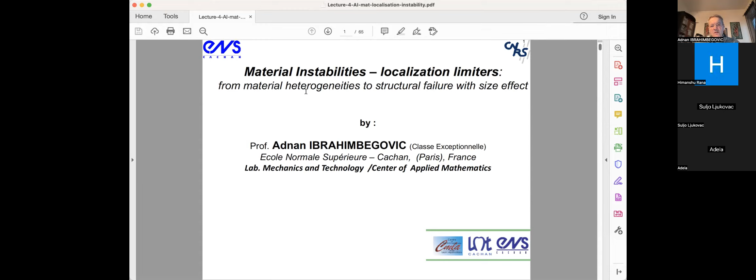That is explaining why the big structure built with the same material is not going to break in the way that a small specimen built with that material is breaking. So we'll first study the structure level and then the material level. Let's try to dwell into this a little bit.

Lots of this work comes from a long-term collaboration with Electricité de France, which is even at present I think the biggest French company. We first started collaborating with Electricité de France, then we went to the nuclear energy branch, Commissariat à l'Énergie Atomique, which is the scientific branch of Electricité de France. Then we went to Areva, a private company dealing with reactors, now split into Orano and another part. And then we finally switched to Institut de Radioprotection et de Sûreté Nucléaire, the government institution. Autorité de Sûreté Nucléaire is the government body that gives the codes for keeping these nuclear power plants, and IRSN is actually the scientific branch of this Autorité de Sûreté.

So the goal was what? To keep these nuclear reactors operational from 30 to 60 years. That was the case before Fukushima.

So this is your typical nuclear power plant. This beautiful structure here is a cooling tower. It's a hyperbolic paraboloid type of shell, 110 meters high, a typical installation with a very complicated loading program.

Since we worked on shells, every time I discussed with Electricité de France, we had a joint laboratory, so every year they would give us two or three theses. Many of these people were working funded by this, and then several of them got jobs in Electricité de France type of environment. So whenever I suggested that we study the cooling tower, they said no, we don't care, this is just for cooling, and every year we can afford to lose one of these towers. It's not important. What's important is the ugly duck.

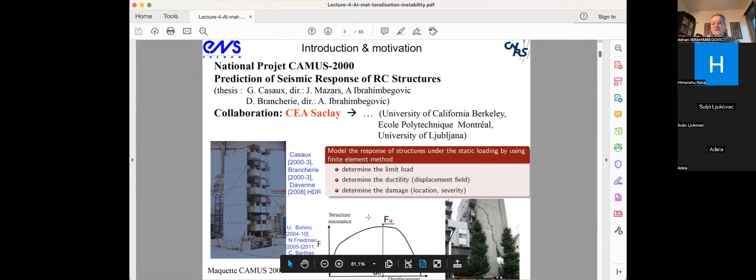Also, eventually, you had to get hysteresis loops of the stress-strain diagram, which is much more complicated. This is similar to what I was telling you yesterday with the PHL type of work, where we were able to match that. Then you can do the same thing with steel type material, starting from a very low scale, meaning you can take a typical behavior of steel with the sigma-epsilon stress-strain diagram, with lots of ductility, yield stress, and so on.

And then you turn this into a structural model. That is also something we'll discuss.

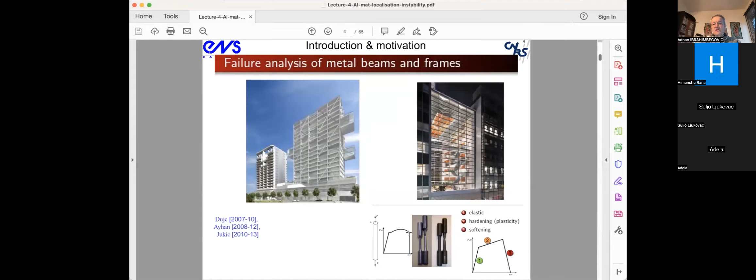So for me, it started one year after I came to École Normale Supérieure in Cachan. A year later, in 2000, we had the benchmark competition where Électricité de France asked us to present what kind of damage models we have so they could purchase them. In this competition, I think everybody who is anybody in France dealing with this problem participated, along with many people from Germany, Spain, the US, and so on.

Since I had just arrived, the way it works in the French system, I inherited three lecturers who were trained by my predecessor, Mazars and Pijaudier-Cabot, who developed these damage models in a local version. I'll talk about that in a moment.

Basically I said, okay, let's just use the stuff that you have and we'll present what you got. It turns out the benchmark was about presenting your results for a certain number of cases they put together and asked you to show your results. Among all those cases, the most difficult one to handle was this case here.

This was a plate, or membrane rather, with two notches, a double-edged notch specimen. They had a frame to keep it fairly constrained. Then they introduced a non-proportional loading program where they started by shearing this plate and then basically pulling it apart, so you can see what that provoked.

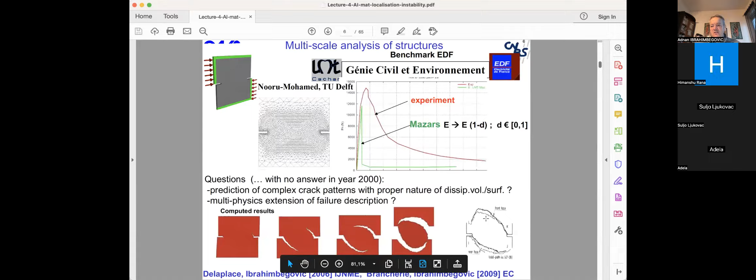The problem there is really that with such a complicated crack pattern, you have many redistributions and lots of directionality taking place. Basically, if you take finite element interpolation—for example, a constant stress triangle—whatever you do, no matter how complicated a model you put in terms of plasticity or damage criteria, your stress inside the element is constant. So basically you simply cannot represent everything taking place in a phenomena of this kind.

So we said, okay, this is really not good, and there's no way you can succeed this way. So we decided to put down certain guiding principles to construct the model. First of all, instead of trying to put everything into a single criterion, we try to separate complexity. In the process of breaking, we try to identify all mechanisms that exist, and to each mechanism we give its own criteria. So we go more in the direction of something called a multi-surface or multi-criteria type of model rather than a single criterion which puts everything together.

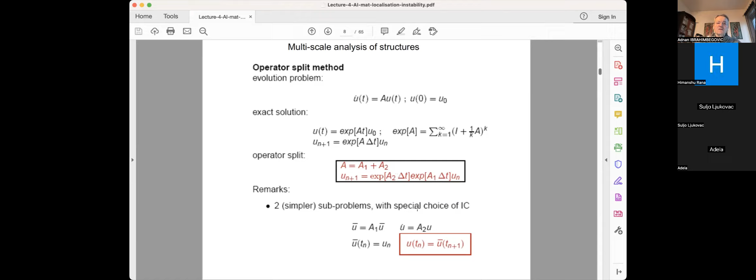So you can go towards a typical operator split solution, where you solve one part once, keep the other frozen, then solve the second one, and so on. In the operator split solution method, what's really important is that as soon as you've done the first one, you start to plug it in, and when you compute the second one, you start from the result you obtained from the first.

This was already the case for typical plasticity. Just to recall, typical plasticity with linear isotropic hardening, or what Nguyen and Halphen call the generalized standard material, has state variables that are the total strain, the plastic strain, and the hardening variable. We compute this evolution by a rate version of the equilibrium equation, d dot equals k inverse times f dot.

From that, you get epsilon dot as the symmetric part of d dot. Then epsilon plastic dot equals gamma dot times d phi d sigma, and xi dot equals gamma dot times d phi d Q. When computing this, you first get the elastic response by keeping the internal variables frozen, and once you have the total strain as the best iterative guess, you move into computation of the plastic strain and hardening variables.

This first part is global computation that concerns all the nodes, while the local computation takes place in each and every element or Gauss point. The goal of this local computation is to produce the stress and the variable Q, which is thermodynamically conjugate to the hardening variable, allowing the criteria to be negative or zero, rendering the stress field plastically admissible.

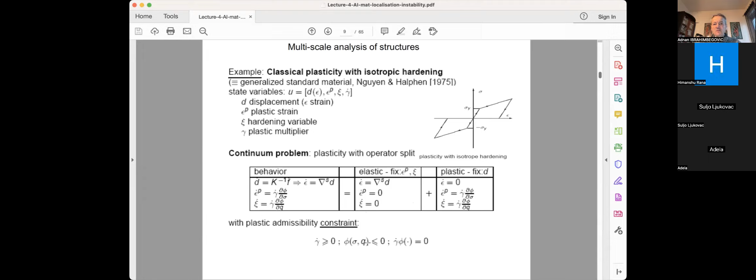Another important point: the evolution equations of internal variables like plastic strain or hardening variable should be characterized by a characteristic time much shorter than the other variables. In other words, in a simple tension test you increase stress and strain very slowly, but yielding or micro-cracking, depending on the material, happens very fast. In rate-independent plasticity models, that basically happens instantaneously.

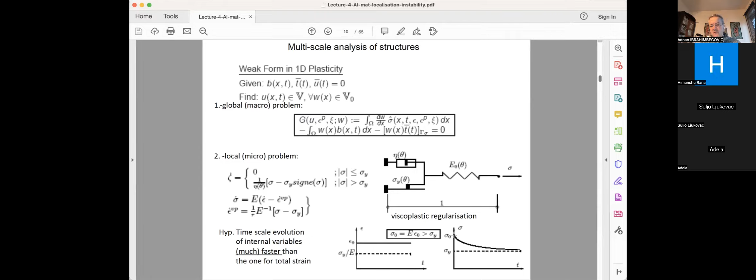There are actually two kinds of space scale, and two time scales. We are computing a problem where you have evolution of different variables, including internal variables, and you want to build this all the way to localized failure. So we have to motivate this for particular materials.

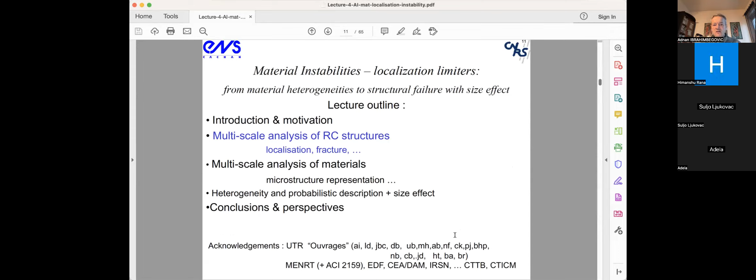Here I took the example of interest for protecting nuclear reactors, the containment structure, which was reinforced concrete, and we study localization fracture. But this type of material is rather similar to many other composite materials in aerospace engineering, such as carbon fiber reinforced polymers or glass fiber. Many wind turbine blades are made with glass fiber reinforced polymer and so on, because carbon is very expensive.

What characterizes these materials is that you have very long fibers which are much stronger than the rest of the matrix. Here the matrix is concrete and the fiber is steel. Steel is certainly much more resistant than concrete—about 20 times more resistant to tension—and it helps improve the performance of this reinforced concrete type of composite, just like carbon fiber reinforced polymer, where carbon fibers are there to maintain resistance to traction.

Now, if you really want to study the fracture of a structure built of such a composite material, this becomes a multi-scale problem. The scale, meaning the precision of the description of your model, that you need to account for depends on the goal you have.

So first we start with a study of structural integrity. In this case, at the reinforced concrete structure scale, in order to build a real model you have to deal with the concrete and steel, and eventually the interface, the bond slip between concrete and steel, to really describe everything going on. Among those, crack spacing and opening is definitely one of the most important types of data we are after.

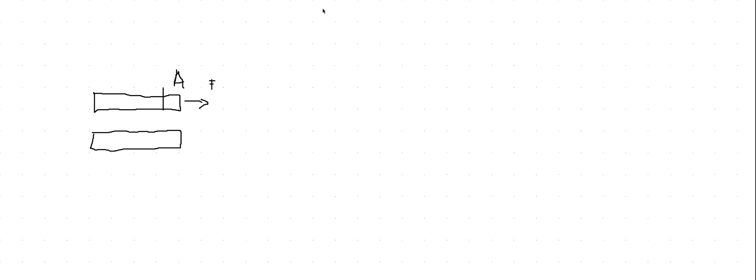Let me give a little illustration. If I take such a structure — this is my structure — and I apply here a certain force F, with a cross section A, then whatever part I cut this structure into, I will have sigma equal to F over A. If I put a support on the left-hand side, the reaction also has to be equal to F — nothing else can it be. So this is equal to some kind of constant, and before you break it completely and reduce it to zero, it is always constant.

So if I'm plotting my stress-strain diagram, this is epsilon, this is sigma. I take one situation where this is a yield stress equal to sigma y, and after that you have hardening.

If you want to do a better type of control of what is going on, I'll take my stress-strain diagram, and in one of these sections, let's say somewhere here, this will be not sigma y, but just 1% smaller. Why do I do that? Well, I take into account heterogeneity.

And basically also, I can better produce my finite element mesh, so it can go along. So when I start loading, as soon as sigma reaches 0.99, this one starts yielding. So the next step, this one will go into elastoplastic deformation, while this one will still be at the previous level. So for the hardening part, I have this one here, and there's just a tiny bump, and then everything else will be the same, which corresponds to this epsilon y, let's say.

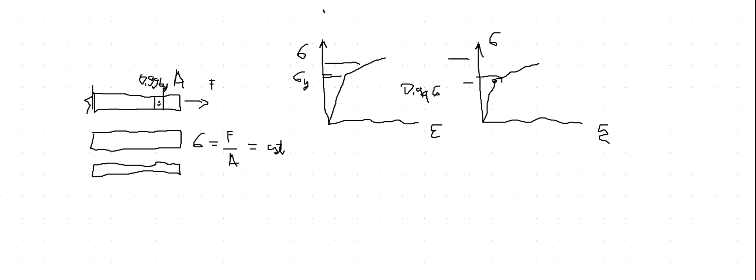Here I'm already a little bit more than epsilon y. The idea is that when you have hardening, I can reach the same level of stress, and they can catch up, and only this little bump will always appear, but you can ignore it if it's not too big, and everything's fine. Now imagine that you don't have a hardening, but you reached with sigma y the peak of resistance. So up to sigma y, you are loading elastically, you're going up, and after that, this is the end of the story, you're going down.

So imagine now again, you have weakened the other guy, and so this is not sigma y, but this is 0.99 sigma y. And then you go down. So this was elastic loading, and this is your plastic loading. So what happened this time, when you reach, now this is your epsilon for hardening. And let's see what would be epsilon for softening. In the softening case, you would reach 0.99 sigma y divided by E. Up to there, everything is fine.

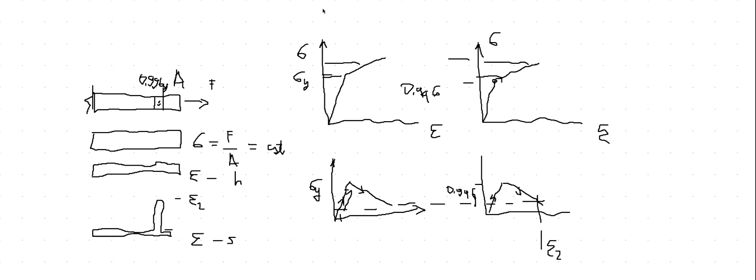Now, if you want to represent this type of thing with the finite element method, you would need to take into account really very large displacement gradients in order to get this under control, which is definitely not so easy. A single element will not do it, that is for sure.

So basically, just to give you a glimpse of that, what happens is the more elements you put, for example, stress is always constant, but you put something like 3, 7, 15, 25 elements, the strain profile is such that basically only one of these elements, which is weakened, plastifies, it goes down to softening, and only that one gets a very large strain, and all the others unload elastically.

So if you now take this to a usual finite element computation, the dissipation is the length of the element which is plastified. So as the mesh gets smaller and smaller, the element which plastified gets smaller and smaller. So integrating over something which is very small, you get something close to zero. A finite value of strain, integrated over something very small, becomes something very small.

But this cannot be representative of the real fracture phenomena, because you know by experiments that if you want to break even a piece of paper, you kind of have to put some energy. So basically, this was obviously a problem, and that led to mesh-dependent simulation, mesh non-objectivity, and stuff like that. So instead of converging with many more elements, you start actually getting something which has no sense, you go to zero. So people have noticed this, and they tried for a long time to take care of this.

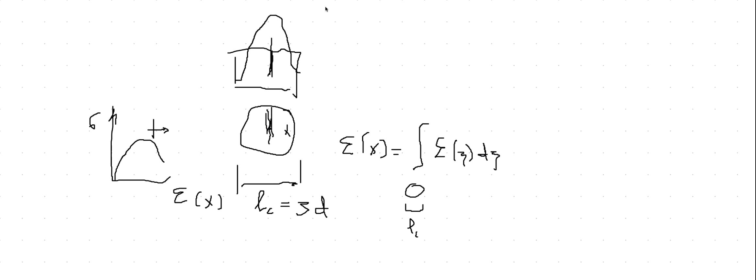He said for concrete, we take three times the grain diameter of the concrete. But the grains you have, like aggregate, you have big and small ones. So which one do you take, basically?

And then when he left and I replaced him for one year, most of the time I was helping with his students. There was a young lady working on this, and they were studying this non-local damage model to identify results for the three-point bending test with a notched specimen.

So if you start breaking here, he would take this region, and in the strain that you want to average, you get the strain at the other side of the notch, which is a little bit crazy. What the hell? When you have a notch, when you have a crack here, obviously these two strains become quite independent, they kind of separate because they don't talk to each other, the crack is in between.

So there are many things you can criticize, but anyway, that was the way they were doing it at the time, the non-local model. In the code used by the nuclear industry, code Castem, well now it's called CAST3M, like third millennium, they have this Mazars model, E times (1 minus D), with a piece that was done by the non-local model, putting in this characteristic length and stuff like that. They might have a similar thing in Code_Aster, used at Electricite de France.

Then they realized that the same trick with the non-local model, you can do it with the gradient model. Basically, going from the crack band to viscosity is the same thing here.

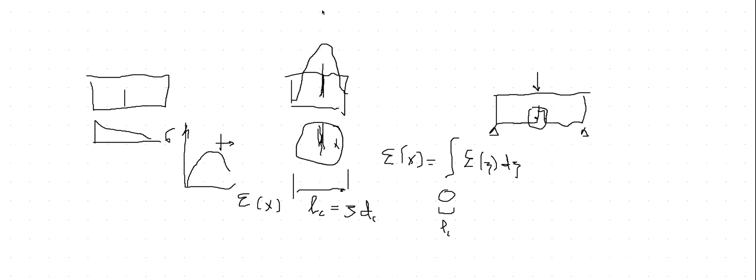And if I want to represent the crack, I take a Heaviside function, h at x bar, where x bar is the given location where the discontinuity occurs. This equals 1 when x is larger than x bar, and 0 when x is less than or equal to x bar. So basically you get the displacement jump, which describes this crack.

And indeed it corresponds to something we've done intrinsically, because you could see this strain profile getting more and more sharp. So now you take the displacement to be n1 u1, n2 u2, plus this Heaviside times the displacement. If you build the whole displacement field, it would look like this: u1, then a linear interpolation, then a jump, then another linear interpolation.

So what's kind of tricky is this parameter - u would equal n1 u1 plus n2 u2, which is your usual interpolation where u1 and u2 are nodal values. For example this is your u1. Then plus you put this Heaviside function of x at x bar times some parameter alpha - that's your alpha. And here would be u2 plus this alpha. If you do this, it turns out every adjacent element has to know about your alpha.

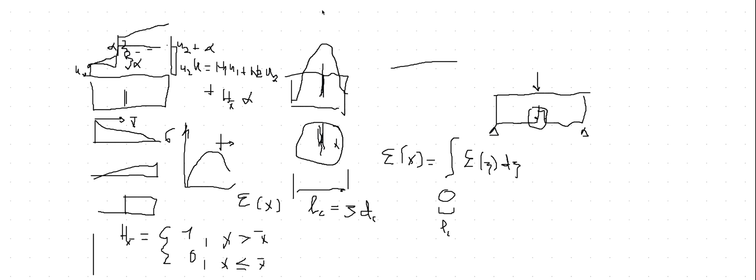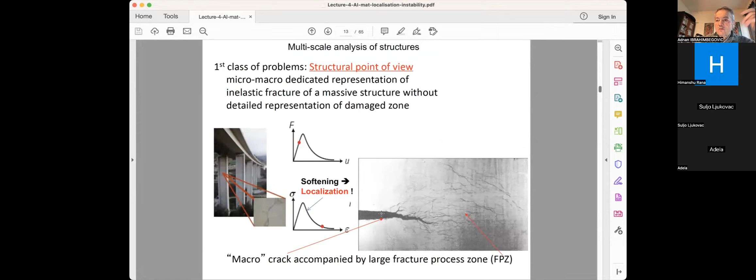The difference from what other people are doing, and the thesis of Delphine Brancherie - what we've done is account for the fracture process zone, because our structures of interest were massive structures which have this fracture process zone. For this case, you're still hardening, then you go into softening with the crack. So in a 2D, 3D situation, the crack can be developing in one direction while the fracture zone remains active in another direction where the crack isn't influencing it. If you go to non-proportional loading, you have to handle this more general scenario, and that's actually what we're aiming for.

In the 1D case, that came down to this: rather than having just elastic and then softening, we had elastic, then a fracture process zone for the micro cracks in the fracture process zone, and then you go into softening. And when you unload, of course you have plasticity and stuff like that.

So what comes out of this analysis - we again go through thermodynamics with the criteria for yielding. We'll discuss this in a moment. But the idea is that the total dissipation can now be split into the volume part - this is what you normally take for plasticity, sigma times epsilon plastic dot, plus hardening variable q bar times xi bar dot, we put the bar for the hardening - and now we have to introduce the softening variable q double bar times xi double bar dot.

Now this is the softening part. So the total dissipation is additive, being able to handle simultaneously the volume part in the fracture process zone and the surface part along the crack. Until the crack is completely separated, you still have some dissipation.

In order to clearly do the additive composition of the total dissipation into volume part and surface part, you have to enforce the stress, what we call the orthogonality condition, which says that for a particular element, the work of the stress on the virtual deformation associated with the softening part should be equal to the work of the traction opening the crack on the displacement representing the crack. This is the 2D, 3D version of the same condition.

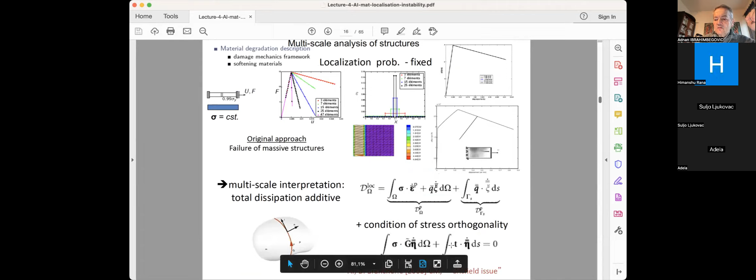So basically here we are saying that the jump in traction should be equal to 0. By the Cauchy principle, the traction is computed by the stress tensor times the unit exterior normal vector. That normal n being constant, once you have a crack, you don't change it - you cannot remove the crack, it's still there. Basically, then the jump in sigma has to be equal to 0. So this is the extra condition that we can use in our weak form.

So when you're developing your weak form, you build this by getting the equilibrium equation weak form, and then the Neumann boundary condition in the weak form, plus this jump condition in the weak form again enters there. So these are your equilibrium equations.

The next one is the kinematics equation. Now we said we need a representation of the jump because of the localized behavior. So we introduce this Heaviside function that I just described. Only in 2D - 3D is a bit more complicated, it's not just x bar, it's gamma, gamma being the surface which is positioning this localization.

And basically, then you take a normal field represented by the finite element that we call U bar. This is the regular displacement field that you represent with your shape functions, NA, that you chose for a particular element. We studied the three node element, 4 node element, and so on, so you can take the same ones.

And on top of that, you have this parameter U double bar, a function of time, times the Heaviside of gamma S. Heaviside of gamma S is the function which takes a value 0 before you reach gamma S, and then after you pass gamma S and all the way to the right, it takes a value equal to 1.

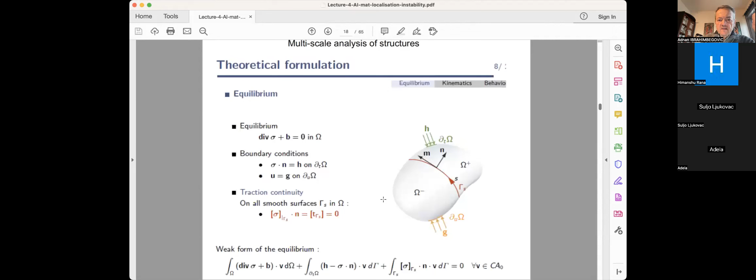Basically, this is the same as saying that I want something which is, in each and every direction, kind of reasonable, because if the fracture process is based on typical micro-cracks, they really go in each and every direction. So the fact that they are isotropic is not a problem. What becomes a problem is after you reach softening, then obviously you have a crack, you have an orientation. You have to choose your unit vector exterior normal and not move it anymore if you really want to handle the crack properly. So that's what we've done here.

Once you reach that point, we then had a two-surface plasticity type of model for the softening. We have an N component of the traction, which is the one that opens the crack. We compare this against the value of the ultimate stress when the softening starts. And you have this softening variable q double bar, which accumulates this quantity.

And on the other side, we also put a second criteria, which allows you to take into account the sliding, because you can break a surface in terms of like if you pull it only in this direction, or you can slide it and also break the kind of cohesive links between these things. So M is now in the direction of the tangential sliding, as opposed to N.

And so the traction is computed by the Cauchy principle, sigma times N. So you have two components, sigma NN and sigma NM. Sigma NN is compared against sigma F, and sigma NM is compared against sigma S, which would be like an ultimate limit in shear. But then both of these are building their damage inside the same softening variable.

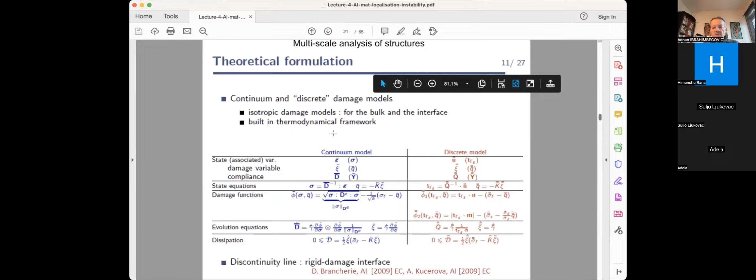Now, instead of that, we simply take a discontinuity. So here's your discontinuity typically built at the center of the element. And then we can get the interpretation of our strain field, which is basically done here, where you compute the gradient of such a discontinuity. And this amounts, with the finite element implementation, to this G variable.

So this G is very much the same like in incompatible mode stuff, but the function M is not a quadratic bubble function like you have in Q4 elements, but this is a type of function that has a jump inside the element. So this is your M, derivative of this M with respect to X and Y, properly arranged like in a B matrix, will give you the G matrix.

So when you have these elements which are crossed by this discontinuity, I can have each and every of these elements will have an extra function which appears there.

So when all is said and done, in terms of the weak form equilibrium equation that you have solved, you have a set of nonlinear equations that has to deliver the nodal displacements. And on top of that, for each of the elements which is crossed by this discontinuity, when you have a localized failure, you have an extra equation saying that the stresses in the fracture process zone should be matching the traction with the given type of work. And basically the role of this will be giving you the opening of the crack for each of the element which is activated.

This could be handled very nicely with the same computational approach like in the incompatible mode method. In other words, you have a global loop getting the best value of the total displacement, which gives you the best value of the total strain. Then at the element level, you can have this type of equation, which follows from linearizing the second equation for each of the elements.

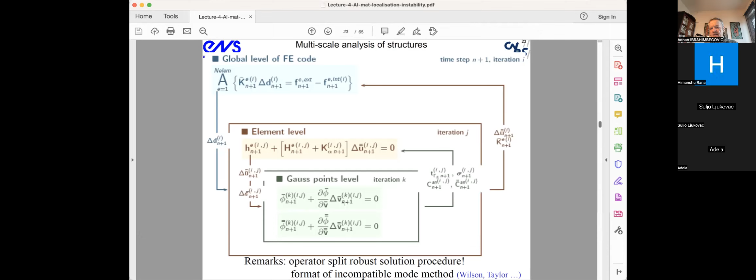What kind of result can you have? First of all, in the first paper that I wrote, we had basically the plasticity. I used the B-bar method, which is one alternative method to enhance the behavior for quasi-incompressible behavior of a J2 plasticity. And then I could leave the incompatible modes to represent this localized failure.

So you can see that if you use this approach, you're really perfect with either mesh, coarse or fine. This was like a simple tension test with this specimen. Again, we had these two double notches, placed on purpose at the distance where the type of failure that would occur is very conducive to plasticity type of material.

So first you have a fracture process zone, where you have some kind of hardening variable building up. And then when you reach ultimate value, you have this shear band sliding at 45 degrees, which is just perfect for plasticity. And you can see that it's not a single line, but actually a bunch of these lines.

But what really matters, we are not chasing the lines. First of all, they have good orientation. They're not a single line. You can say, okay, they're not a single line, but you don't need the line anyway, because on the basis of the finite element approximation, which is already an approximation for elasticity, how can you then get the exact solution for inelasticity? This is a joke.

But on the other hand, you can have the best representation for the energy and the best representation for the dissipated energy. And that's precisely what you got here.

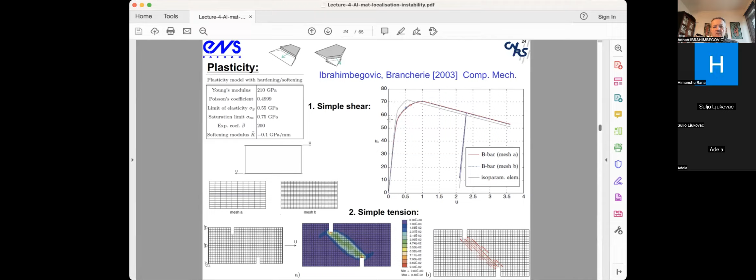So this was already very nice for plasticity. Then we also did it for damage. This was done in the paper that Delphine wrote. Basically, you take the same concept for plasticity, you push it into the damage. Instead of the 4-node element that we've done previously, we took a 3-node element with this discontinuity, the one that I was describing here.

And basically, you can have again coarse mesh, or a so-called structured mesh where all the elements are regular. So typically, you have a simple tension test, so the crack should occur at one point. Typically, we're weakening one of these elements, so make sure that the crack occurs there, although the mesh was not specially defined for that purpose, so it could be anywhere that occurs.

But what's kind of funny is that the crack is represented only by the orientation. Orientation is always right, but the length is not necessarily right because you sum up all these red lines which are representing cracks inside each and every element. So if you sum it up in coarse mesh, that becomes 157 millimeters. If you sum it up here, that becomes 133 millimeters. So the length of the crack is not the same, but who cares about the length of the crack? We need orientation and we need dissipation.

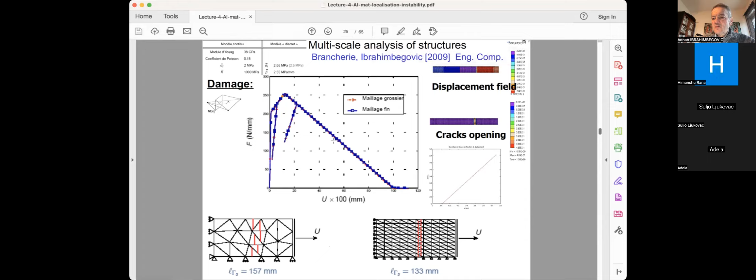Basically, the idea is that either you take a maillage grossier, that means coarse mesh, or maillage fin, that means fine mesh, the result happens to be the same. Either red or blue, everything is perfect.

Then we played with this idea: when you have only softening as opposed to when you have a fracture process zone. This is part of this Nooru-Mohamed test already, and we took a part of that and ran the example. We have a possibility to harden and then go into softening. So you can see that it develops quite a significant fracture process zone, and then after that, the softening takes part, and all the dissipation goes into softening. This one gets blocked more or less.

Or if you have only elastic and then softening, then the result is not the same.

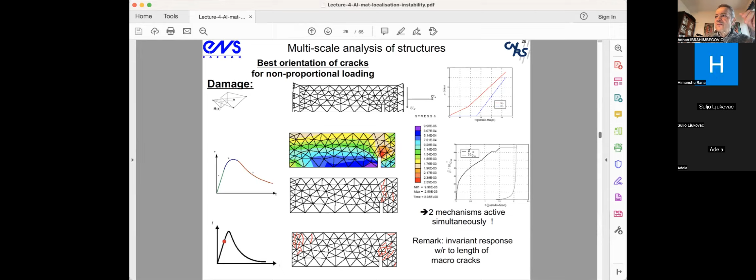The cracks are all over the place, and definitely you need the contribution of fracture process zone to stabilize the cracks, how they propagate. Here there are way too many. Here there's a reason for that, just like it was observed experimentally. So fracture process zone is really good transition when you're computing your stuff.

Then we are doing this for 3-point bending. Basically, in many of these cohesive materials, the way you can obtain the tensile strength is not by simple tension test, because the type of material you cannot put in the testing machine, it will break. So what people do is so-called 3-point bending. They put these two supports under a simple beam and then push it in the middle. And in order to master this a little bit better, they put a notch in the middle, so the cracking will concentrate there despite any heterogeneities. And that was used to identify the parameters of this model.

So what are the parameters of this model? We have Young's modulus and Poisson's ratio characterizing elastic response. Then we have a limit of elasticity and the hardening modulus. And then finally we have an ultimate stress that leads to softening failure, either in mode 1 or mode 2. And we have something that allows us to quantify the total energy that goes into this. So in any case, even though it's written this way, what we are really computing at the end is the energy parameter that goes into that.

Now, if you are not happy with the solid mechanics type of approach, you want to go to structure mechanics. This work comes from one of my students from Vietnam.

I had 5 of those. This is the first one who came. He already was at a rather advanced stage when he came. Ba Hung Pham. Ba Hung is a hero. So Ba Hung is a hero. After he finished his thesis, he organized a visit by the ambassador of Vietnam and also the Minister of Construction in Vietnam. This is a big job because Vietnam is 1,200 kilometers from Hanoi to Saigon, or Ho Chi Minh City, and you have to do lots of construction. In this visit, these guys liked my performance because I was the only one who could explain what École Normale Supérieure is all about, because they have École Normale in Vietnam, and they don't know what École Normale Supérieure in France is. The minister asked whether it's better or worse than university. So my director, who was one of these Normaliens, gave a speech for 10 minutes explaining the French Revolution, norms, and Normaliens and stuff like that. And then the minister was just staring blankly. At the end, when we stopped, I said, if I allow myself to speak after my president, I can just answer your question too. I'll tell you what my students told me. If you ask yourself whether university is better than École Normale Supérieure or worse, École Normale Supérieure means that it's normal that you are superior to universities. And the minister said, huh. So I was the only one who got a tie as a present. Nobody else got any present. But my student got a job as secretary of the Ministry of Construction. So when he came to me, I asked him what he was doing. He said, we are constructing this high-rise building, 100 stories, and we are doing this computation with this Eurocode. I said, what the hell, Eurocode in Vietnam? But what the hell, obviously they think it's a good code.

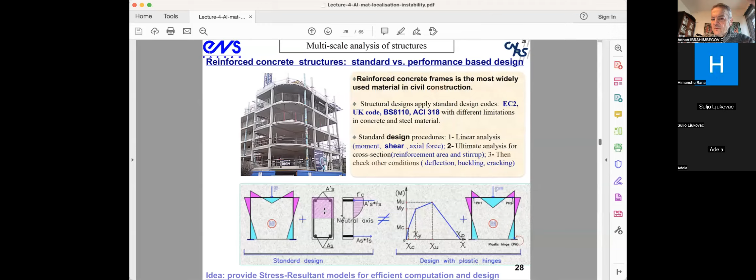So basically, this was his job. We did different models. One was basically that you do it by hand, and you introduce directly this type of diagram into this construction.

And the other one, you do a multi-layer in 2D or multi-fiber in 3D version of that, and you can simply feed every fiber either concrete or steel behavior. Of course, this one takes more time, but it has more features.

And then finally, we also did this one for predicting the crack spacing opening, but this was another student, Amor Bukretuz. After that, he started working forever - he did his thesis for us, but then didn't want to work for the state, since there was better salary working elsewhere. So let me just explain a little bit quickly.

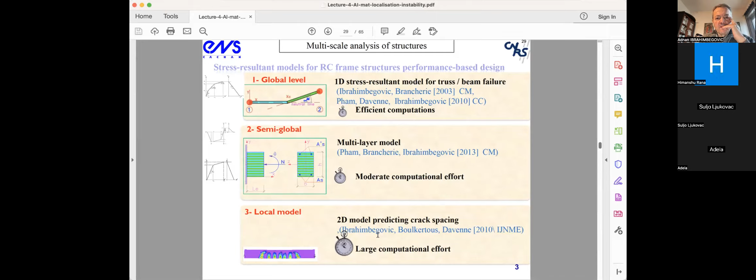First of all, the Timoshenko beam is a very simple model where you can have an interpolation of the rotation of the cross-section theta, given by a two-node linear element. And then if you want to have a jumping curvature because of the plastic hinge, you have to introduce this Heaviside function, just like when you have a fracture in a bar. So here it's really like the bar, only this is now for the rotation field. So theta of x is n1 theta1 plus n2 theta2.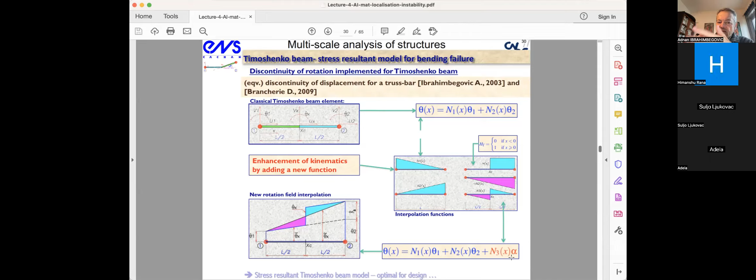Then you introduce the Heaviside function if you want to break it, and you put this alpha to be the change of rotation, which is not smooth because you have a breaking. And then you can actually eliminate the influence beyond a certain element - you turn this into an embedded discontinuity, this parameter alpha. Then you get the curvature to be a regular part plus this Dirac part. And then basically after that, you can get your interpolation of the curvature.

You have to do it to make sure the patch test is verified, so you have to pull it into a certain normalization. So for every element which gets plastified, you have an extra equation to be solved - giving you basically the moment in the bulk and the moment at the discontinuity should be matching to be the same moment. This is it here. And all the other equations are the usual equations for beam equilibrium, where you have normal force traction, shear force, and moment, and you're basically computing all this.

So we were able to use this to check some work for Code_Aster. So this is your typical finite element model of the reinforced concrete beam. What they used - they had the experimental results.

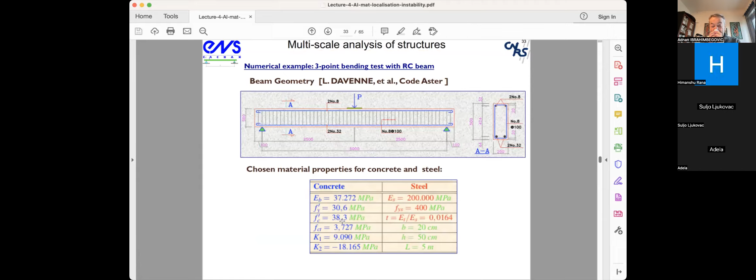So Luc Davenne was running this thing, he was helping with it - he was one of my lecturers, probably the best one there. And we were able to show that, as opposed to Code_Aster, which cannot go further than that, we can do all these shapes perfectly and get good matching with respect to this type of thing.

This was a benchmark competition done by people from the Swiss Federal Institute of Technology in Switzerland, in Zurich. The professor was retiring - he was an expert on shear failure in concrete. So they designed it on purpose to be very poor, so the shear failure would occur, and they were testing this at that time.

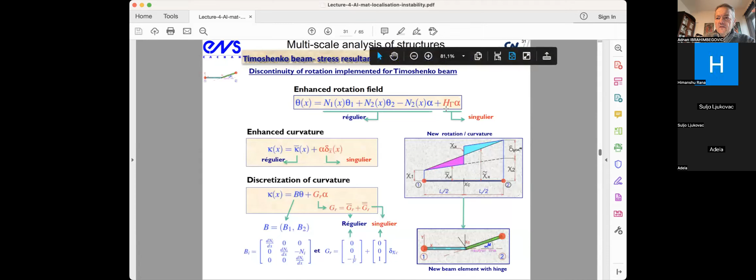I was visiting, so I could take pictures, because we matched these results with everything since we had the experimental results. Basically, what was the trick? This was the bending failure case. If you want to have a shear failure in the Timoshenko beam, you need a transverse displacement and introduce this jump. Then basically you can have a shear hinge on top of the bending hinge.

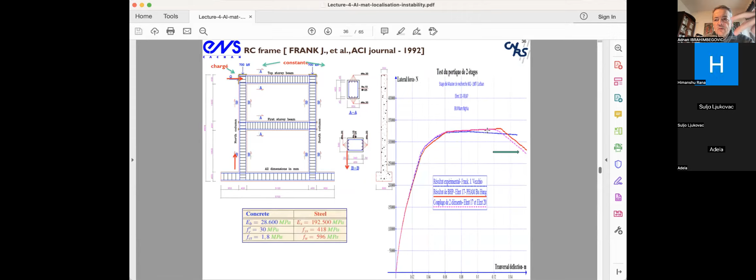So you can simultaneously run the analysis where you allow for the bending hinge and the shear hinge, so you can have really u, v, and theta - three displacement components for bending. So for axial, shear, and bending, you can get any hinge you want. He's playing with different scenarios - either only a shear hinge, or a bending hinge, or two hinges, and so on and so forth.

This one, maybe I'll stop, because this is really the most subtle part. Well, maybe I could say that as well.

The trick is, if you now come to reinforced concrete - this is now follow-up work with Amor Boulkertous, who was doing his thesis. Amor Boulkertous is normally a very intelligent guy, but a little bit lazy, so he was very quick in the conferences we were doing. They all came together.

So he was talking to the guys who did this before him, Delphine Brancherie on the concrete, Norberto Dominguez on bond slip, and he put it together, and very quickly had results. Then got a good job. What can you do? You have to be intelligent and lazy, and sometimes he gets all this. But the idea - I had to write a paper, but then it was at least better written. So the idea is as follows.

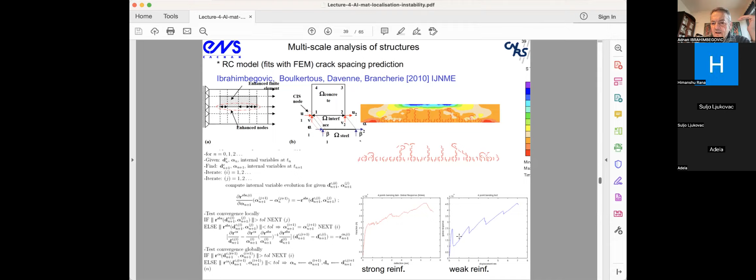And basically what it can do is really teach you how the reinforced concrete behaves. If you have very strong reinforcement, every crack is just a small blip. If you have weak reinforcement, like Mike Crisfield - who worked first in civil and then in aerospace engineering - studied this with the arc length method, you really need something that allows you to go with a peak every time you jump over there.

So this is really the type of thing, and then we were playing with the heterogeneity. If you look at this type of beam test done in France, this is the thesis of Daoud, done in Lyon, with a different type of specimen, you can see the crack spacing is not uniform, but it varies from 14 to 19.

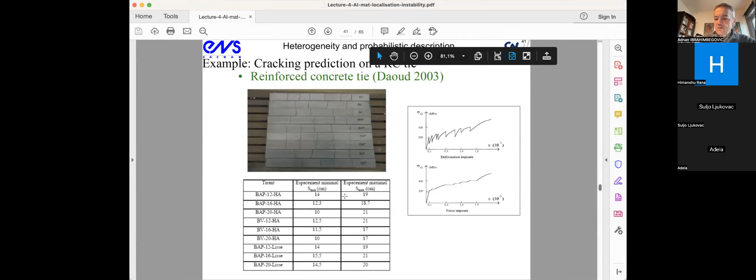So in Norberto Dominguez's thesis, we were playing with these different things. Basically, it's important to put in bond slip, otherwise you get gibberish. If you keep it constant, it's not good, but if you take a variation of 5%, say a Gaussian distribution, you start getting a real distribution of these cracks, from 13 to 19, which matched perfectly with the experimental range of 14 to 19.

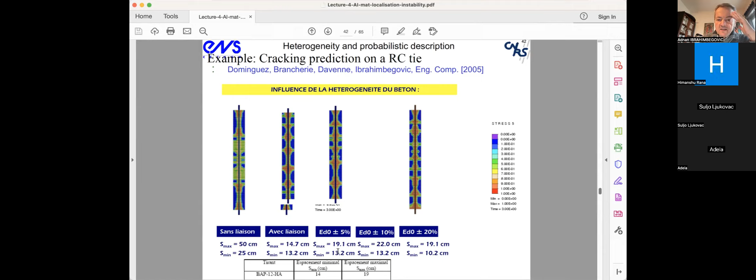So basically, this is the idea I wanted to explain in this lecture. We were able to introduce results capable of dealing with material instability, meaning the complete failure process going into softening and then final fracture. The best choice of material parameter in our model is the fracture energy, which lets you go all the way to ultimate stress and down to zero. The original feature of the model we developed was the ability to account for dissipation from volume, which is the fracture process zone, and from surface, which is the macro crack—something not many models can do. We then pushed this into structural models to be more efficient, like a beam with different arrangements.

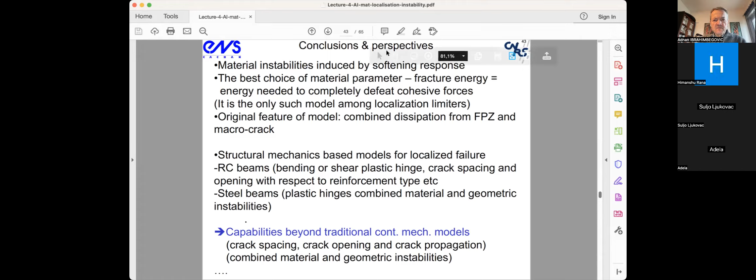We also had that for steel with plastic hinges and such. So the capabilities of this model go way beyond traditional continuum mechanics models—they can give you crack spacing, opening, crack propagation, and all kinds of instability. That's basically what I wanted to cover before we take a break.

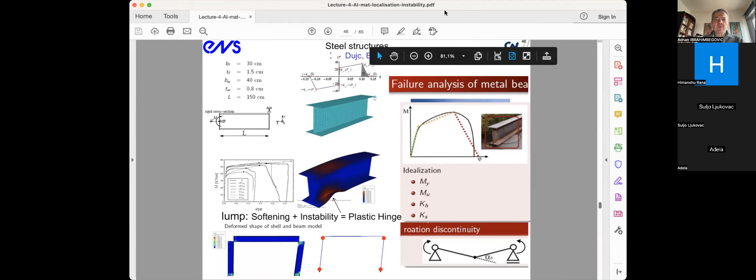We have sigma-epsilon defined for the material, and then you build a very elaborate 3D model with large deformation, plasticity, instability, and so on, and turn this into a corresponding beam element. You can see that you get the same results, or at least the same ultimate load behavior, with this type of structure. So let me stop with this structural point of view.

Now what I want to do is take more of a material point of view. In other words, we can go even deeper into understanding this type of behavior. In this part of the lecture, I want to discuss how to get the best interpretation of some of these tests used for identifying the behavior of composite materials within their inelastic behavior.

In the process, you can quantify the size effect—the observation that the ultimate failure of a very large structure built of the same composite material as a small specimen is not necessarily the same; there's something proportional to size. Unfortunately, the bigger the size, the more likely the structure is to break, because you have a critical concentration of defects, either initial or introduced in the course of loading.

Our motivation was basically the need to interpret the three-point bending test, which is not an easy job, because in cohesive materials you cannot put a simple tension test in the testing machine—defining the tensile strength is certainly very subtle. What you have here is a simple beam with two supports, and you push with an imposed displacement in the middle. Sometimes, to control where the crack forms, you put in a notch so you know where the crack will occur, and from such a test you're supposed to interpret the tensile failure strength.

So what is the difficulty? Well, first of all, if you think of the beam bending and look at the moment diagram, it has a very large value here.

If this is force F and the length L, this is FL over 4. That means you have the largest compression stress here, the largest tensile stress here. Here, there's not much stress. So the stress field is so-called heterogeneous. In each and every point X, you have a different value of stress.

And on top of that, you have a material which is heterogeneous. So you put two heterogeneous fields next to each other. There's really everything you can kind of obtain. So how would you interpret this, how it goes?

From this type of experiments, people obtain their tensile strength, and the most prominent advocate for this type of size effect was Bazant. Honestly, I never understood his explanation.

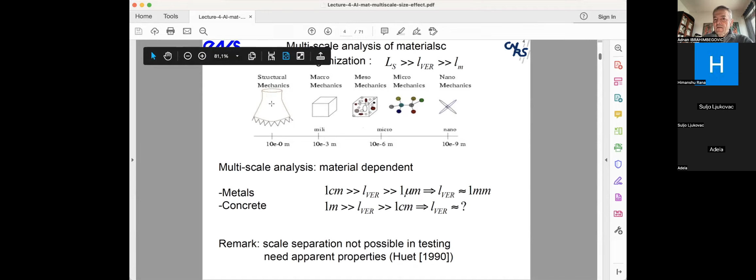When you blow it up to the micro scale, you can say that the average stress at the micro scale, where you now have many points because you see the heterogeneous structure, should be equal to the stress at the macro scale, or you can impose that the average strain, computed from this displacement, is basically the same as at the macro scale. So it's kind of two bounds, upper and lower, and we'll come back to that in a moment.

If you really want this homogenization to apply, the separation of scales should apply. In other words, if a respectable metal structure is something like 1 centimeter, that's 10 to the minus 2 meters, and a dislocation happens at the level of a micron, 10 to the minus 6, then in between 10 to the minus 2 and 10 to the minus 6, you can squeeze something to be a representative volume element. It has enough of this dislocation, so you can characterize the behavior of your metallic material.

Now for some situations it might be difficult, because a typical specimen used in this 3-point bending test is 40 centimeters long, 10 centimeters wide and 10 centimeters thick. If you have aggregate which is like 2 centimeters, you'll have only 5 grains across the thickness. So there's no way you can say you can squeeze your aggregate inside this, unless you're testing a structure in the order of meters, in which case you can squeeze something called a representative volume element.

So the problem is that the representative volume element is not well defined, and this is another difficulty of homogenizing materials of this kind.

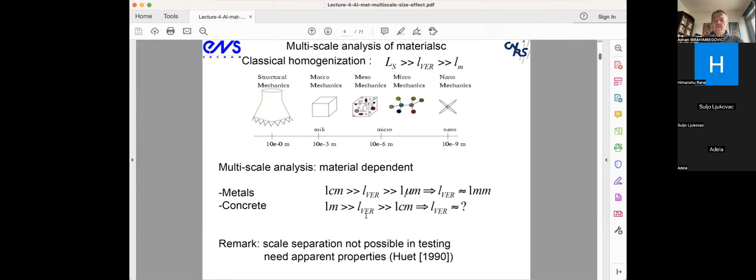So there's something called apparent properties that the late Christian Huet was able to define, which is like a substitute for homogenization, but not in the sense that you go to fracture just because you're computing so-called apparent elastic properties. We're interested not to stop only at elastic properties, we want to go all the way to fracture and failure. So you start by observing your microstructure.

That means you have to have access to the details of the microstructure. You can do this with an electronic scanning microscope, or nowadays with digital image correlation. That is, you glue a kind of film on top of your composite structure, and when you deform the structure, the film also deforms, and you can process the displacement field.

If the specimen is sufficiently small, you can put it in an X-ray machine and do digital image correlation, where you can observe how the different phases of your material at a very fine scale are behaving and deforming. So once you have this microstructure observation, you want to get the corresponding properties at the coarse scale.

We developed the power series representation of the displacement field, and you solve separate problems for different powers of this parameter epsilon, without ever explaining what epsilon is. And then there's the other approach coming from mean field theory, the works of Zaoui, Suquet, and so forth, which says that at the material point you have a single value of displacement, stress, and strain.

At the fine scale of the representative volume element, you have some kind of heterogeneity of the material, and then you impose either the displacement—which gives the stiffest type of structure you can have—or you impose the stress on the boundary to solve this boundary problem for the representative volume element, and you get equivalent properties.

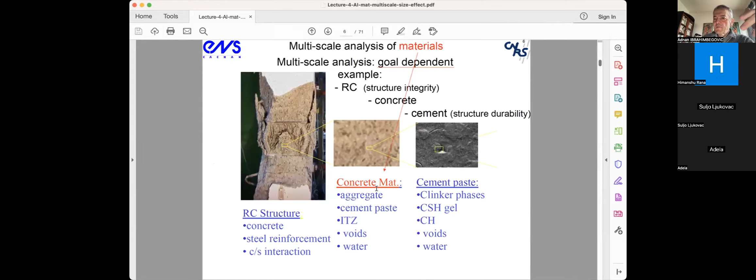So basically we are now at the scale where we can clearly distinguish between aggregate, cement paste, interface transition zone, and so on. In other words, we're going to be running the multi-scale analysis with different inelastic phenomena taking place.

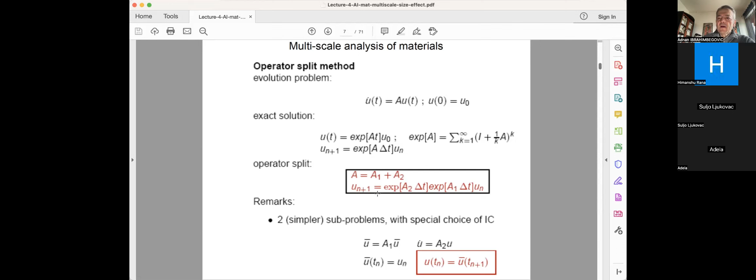And we're going to be using operator split, solving one after another all these phenomena, these variables that can evolve, either the state variable globally or the internal variable locally. This is also done for plasticity.

Recall again, when you have the total set of equations—the equilibrium equation in rate form, the evolution equation for plastic strain, the evolution equation for hardening variable—you can run the first part of the computation by fixing the internal variable and computing the evolution of the total strain. Then you fix the total strain and compute the evolution of the plastic strains and hardening variables.

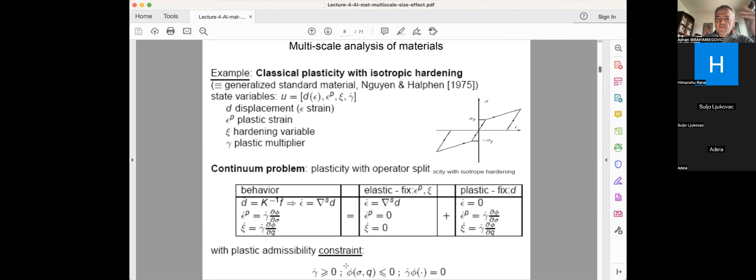So this is global computation, this is local computation. And the goal of this computation is to deliver a plastically admissible stress field, which will make the yield function either negative or zero. Another thing is that internal variables should evolve much faster than the state variables. If fracture occurs very quickly, essentially instantaneously, yielding and so on follows similarly. So in the spirit of viscoplasticity, the relaxation time should be much faster than what you have in terms of increasing the stresses.

These are the types of frameworks we assume to be valid in order for all these approaches to make sense. But rather than just running classical plasticity and damage, this time our goal is to get a better interpretation of what is going on in the 3-point bending test.

So the idea goes as follows. One approach is standard finite element computation, where you build a finite element mesh, and inside each of these elements you build the internal force as B transpose, B being the strain displacement matrix. This is the derivative of the shape function with respect to X or Y for the 2D case, multiplied by the stress that you compute given the total strain or total displacement, plastic strain, and hardening variable.

And then basically you can go to dynamics, with dynamic inertial effects or whatnot. And then at each and every Gauss point integration, you compute your plastic strain and hardening variable and get the interpretation. Now, the problem is if you really want to take into account the heterogeneity of the element.

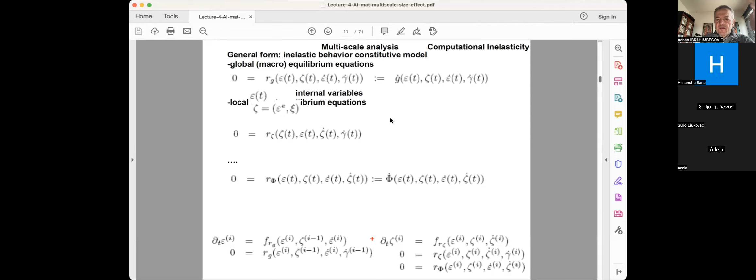This is just one of the papers we wrote with Christoph Kassiotis to show that you can achieve a stable scheme when you have this operator split with different types of things that give you stability. It's a little more, let's say, crazy plasticity, where the plastic strain is represented in a more and more refined way, as opposed to simply plastic deformation, and then we go for heterogeneity and so on.

And in fact this is fine as long as certain conditions are met, and basically you have the contractivity of this computation. This is the result - if you're interested in this type of thing, we have a paper from 2010. But the key thing is how we actually compute it.

So we take a macro scale, which is our concrete specimen, 40 by 10 by 10. In 2D, just 40 by 10. And we take here, for illustration, 8 elements.

Each of these 8 elements has 4 nodes. Inside each of these elements, we put a real microstructure, so you have the aggregate, cement, and so on, plus voids and things like that.

So then we introduce the variables, which go as follows. We have a macro scale displacement, which is the displacement of these black nodes at the structural level. Then you have micro scale displacement that aren't even pictured here, displacing all these tiny nodes. So the mesh is sufficiently defined that you can credibly represent your microstructure.

And then we have internal variables which describe what is going on with the particular damage and plasticity at the level of this fine scale. So instead of homogenization, we are going for 2-scale computation taking place simultaneously.

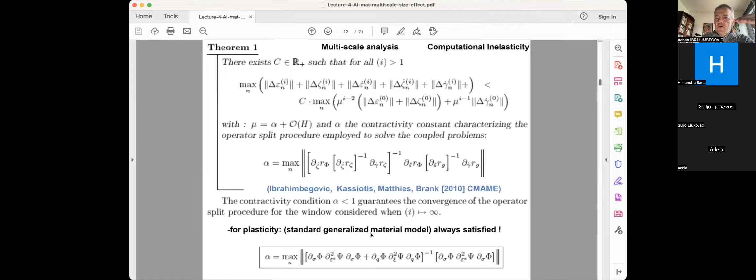In this 2-scale computation, the element level taking into account heterogeneity will replace the typical computation of plasticity. So I won't be computing something with an evolutional plastic strain or hardening variable that is homogenized. I'm going to take into account the real heterogeneity of the material and do computation for real material at fine scales, so I can do this interpretation much better.

So my variables to start with are macro displacement, which used to already be in the standard finite element model, giving macro strain. And then instead of average plastic deformation and so on, now I have a micro displacement and corresponding hardening variable at this fine scale.

So this is the energy that goes into the macro scale, and this is the energy that goes into the micro scale. Basically, this is the interface connecting macro and micro scale in a certain manner, just like homogenization does, either with the upper bound or lower bound.

Maybe I didn't emphasize enough: when you impose displacement for the macro scale or average strain for the micro scale, you get the stiffest response. And when you impose the average stress, you get the softest response. So you have these two bounds, and somewhere in between is really your true behavior.

So it's very similar here. I can either impose the displacement or impose the traction—this lambda plays the role of the traction. And I can have the stiffest response as we go along, plus external loading and stuff like that.

So then I can make some simplifying assumptions. We're talking about 3-point bending tests. I can put external load only at the macro level—in other words, my traction is applied in the middle of the beam. And the weight of the concrete, which is always there, I can homogenize; it doesn't really matter at this level. So all the external load is applied at the macro scale.

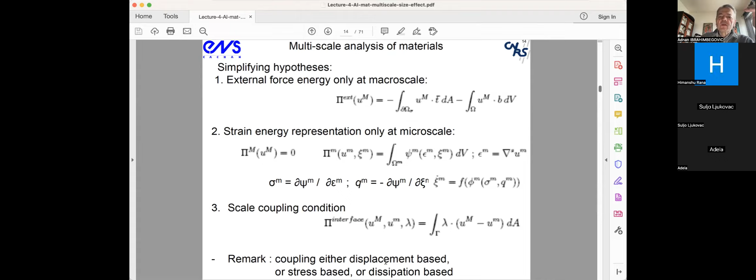One approach is asymptotic development for French, another is upper and lower boundary representative volume element for German, and for elastic properties, they come up to the same result if you have periodic boundary conditions. But as far as I know, they never talk to each other, they just develop separately. So when we did this, we collaborated with mathematicians, and I showed that with a little bit of probability computation, this comes from them.

With such a choice of the fields, we can now go for the variational formulation. You have macro displacement, micro displacement, and the Lagrange multiplier merging these two scales into one. So you can take the variation of all these fields with the microfield displacement, macrofield displacement, and the Lagrange multiplier variation. So you get a set of equilibrium equations at the macro scale, and equilibrium equations at the micro scale. What is set equilibrium equation?

Basically, this is the computation that takes place inside a particular macro scale element. This is really fantastic because it's very easy to parallelize, since typically in the finite element setting you're computing the element properties independently. So you have a code which is computing the properties of your element inside this computation, and the end result will be internal force and tangent stiffness of this macro scale element.

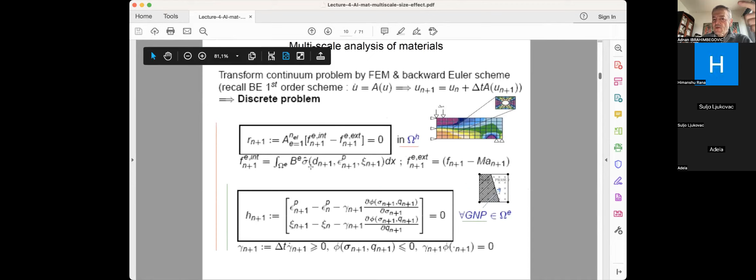Then you go into assembly. This replaces the approach where you do assembly of element contributions, so you can no longer integrate over the macro scale element. The macro scale element is only like an empty shell, which doesn't have itself the definition of stress, but you actually feed directly the internal force and the tangent stiffness that comes from solving a boundary problem at this level of one macro element.

So this boundary problem could be the imposed displacement, which is equivalent to the upper limit, the Voigt limit, or it could be imposed stress, which is equivalent to the lower limit, the Reuss limit. So this is roughly what is going on.

If you have, for example, a displacement-based connection between macro and micro scale, what we do is as follows. This is your single macro element, a 4-node element, which is an empty shell. It's just used to put inside a mesh of these smaller, what we call microscale finite elements. Here, for illustration, we keep it simple, so these microscale elements are also 4-node elements, only smaller. Being smaller, you can take a better representation of heterogeneity.

Each one can have a different Young's modulus, something like that. And basically you have to have an interpolation of your microscale displacement. These are your usual bilinear shape functions for the 4-node element. For the macroscale displacement, these are again your usual bilinear shape functions for macroscale. The only difference here is you have a local frame, which is microscale, and a global frame, which is macroscale. Then you have this Lagrange multiplier, represented with the corresponding shape functions, NA lambda times the parameters of this Lagrange multiplier.

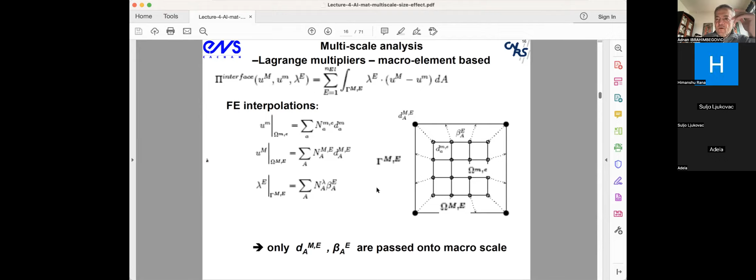So what goes up to the macro scale, when you compute this type of level, are only the macro scale displacements. These are displacements of these black nodes, and the corresponding parameters for Lagrange multipliers, which happen to be nothing but the components of internal force for this particular vector. And of course you'll need the tangent stiffness, which you also obtain in this process.

So in the displacement-based coupling, first I want to comment, looking into papers from people I know well, with whom I collaborated, K.C. Park and Carlos Felippa. These were people who spent many years working for Lockheed Palo Alto, the government agency producing these fighter planes. At some point they got tired, and they became professors in Colorado Boulder, in aerospace, and they did lots of papers in fluid structure interaction.

So they introduced the notion of something called localized Lagrange multiplier. That is, you kind of split the fluid and structure by introducing an intermediate surface. Then the fluid is attached to the surface, and the solid structure is also attached to the surface. And then you can scale this local Lagrange multiplier.

So this is precisely the same idea, only done with the finite element assembly. In other words, the boundary of the macroscale element is just this intermediate surface. Inside each of these domains of macroscale element, you have a separate computation. This computation is attached to the structural level by these parameters of Lagrange multipliers, beta. So basically, at the structural level, you make an equilibrium equation by doing finite element assembly.

So all these betas are stabilizing a structure node. This way you can scale the beta coming from one part to another, because when it starts failing, you want to keep the conditioning of the system in a good way. This is just a remark about computation that you appreciate when you actually do it, but I wanted to say it nonetheless.

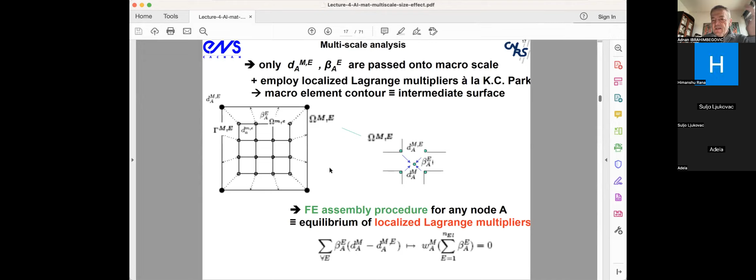So finite element assembly recovers the localized Lagrange multipliers automatically. For displacement-based coupling, with a 4-node element, you take any boundary of this element, and given the new displacement components D1 and D2, the interpolation has to be linear. So all the nodes at the microscale, these white nodes, have to follow this linear distribution of the macroscale displacement.

This could be expressed as saying that the microscale value at these boundary nodes should equal the value of the shape function of the macroscale element at that point, multiplied by the node values of macroscale displacement. This can be set into a fixed transformation matrix T, connecting the displacement of the boundary nodes at the microscale and the corner nodes at the macroscale. This is equivalent to the upper bound, or weak bound, of displacement-based coupling.

You can also do stress coupling, which is relevant when we're interested in bending-type phenomena. It's well known that among all 4-node elements, the optimal one for bending is the so-called stress-based element, the hybrid stress element of Pian and Sumihara. Pian was a professor at MIT, Sumihara was his PhD student. Basically, what they did was consider a pure bending case for this 4-node element.

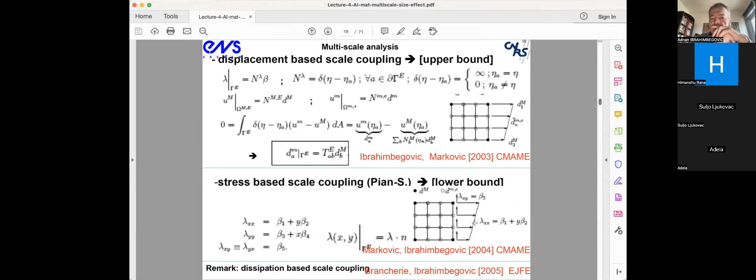We also tried dissipation-based coupling—I won't dwell on that too much—but in any case, when I did the interface, I handled this condition by choosing one of these options. Then I'm stuck with the macroscale computation, for which I have these internal forces and tangent stiffnesses.

So I can always get a new iterative guess for the macroscale displacement. Then I go into the computation of one element after another, providing the initial guess for microscale displacement and stresses, and so on, computing the development of what goes on inside. This is the kind of system you get to solve.

There's one big set of equations related to all the macroscale nodes, and then inside each of these elements there's another set of equations whose goal is to get the corresponding parameters for the Lagrange multiplier, which feed into the internal forces of your element. Inside, you also have the corresponding computation of the inelastic behavior, internal variables, and so on. The scale coupling, of course, goes along with whichever you choose, displacement-based or stress-based.

So this is the type of computation you can run in parallel. We implemented that in collaboration, at the time, with Rainer Niekamp, who was in the group of Hermann Matthies, and with Bob Taylor, the author of the code FEAP. So we did a two-scale FEAP development, with a macro-scale FEAP and a micro-scale FEAP, basically starting by sending to different codes the execution of the boundary problem related to a single macro-scale element.

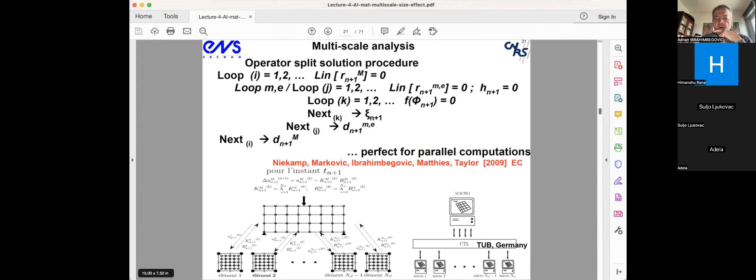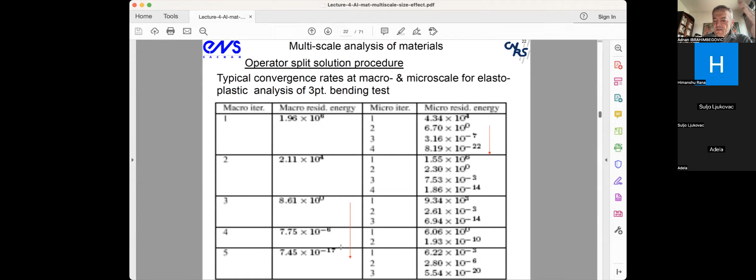We also tested at that time - Damian Markovic was my first student. He's a very lovable guy, one of the favorite friends to many of the NMT students. But at the time, we did not have parallel processing.

So when I came back from Braunschweig, where they had a nice parallel machine - Matthies at the time was the head of the computer center, so it was the most powerful machine to run this - Damian got himself stuck with a network of workstations that people were using to run their own stuff and exchange emails. So I told him, for psychological purposes, just take 1 million degrees of freedom, take 10 of these machines, and connect them. So it took 5 hours - it was not meant for that. Then after lunch you log in and see Damian. He became really hated by everybody. No, I'm joking.

But in any case, what we could test is basically when you start increasing the ratio between two scales, you start getting upper and lower bounds nicely converging to the same bound. You have a scale separation, and you can get all these theoretical results correctly.

We could also test that if you have a demanding problem with a softening type of phenomena - this is illustrated here. Imagine you have two macro elements, and failure starts in one of them. So what happens initially, you had corresponding values of the left and right Young's modulus to be the same, but then you go into softening, and they become much larger than the other one because this one goes into a very small value.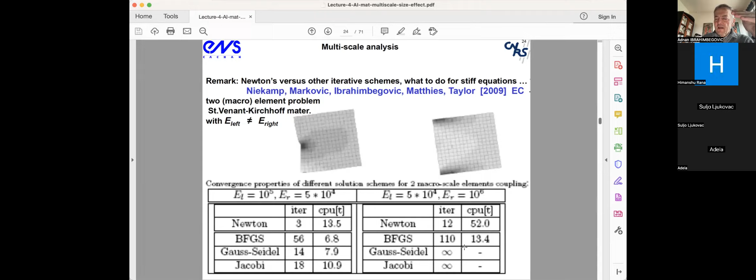But luckily these are cheaper because they're like rank 1 update or rank 2 update of your previous stiffness, so you can actually get it a little bit faster. So we tried all these different things and really confirmed that this method can recover whatever you know from the homogenization story and the computation story, and then get all the new story.

So what is all the new story? Well, first of all, we said that what was done before was not good. Now the key thing is how credible you are at representing microstructure, because the better you can represent your microstructure, the more credible and predictive results you provide.

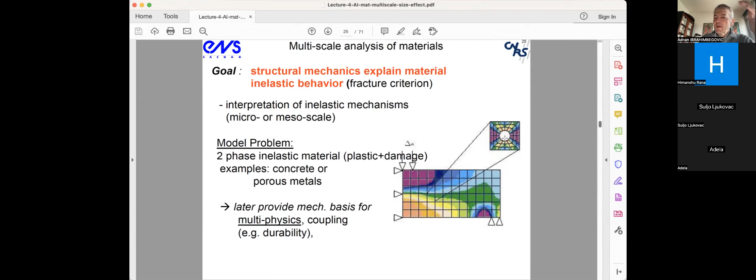So ideally, you take a microstructure and use a so-called exact mesh, where you really follow the details, as in this illustration. We have one void in the middle, so you can adapt your mesh to this void. But then it gets really costly, because representing the details of a complex composite material's microstructure is a big job.

A colleague of mine, Zoe Rabura, is doing that in collaboration with another colleague, Arasanu. I saw the presentation they did. They have these voxels and pixels and 3D meshes, just to get the homogenization done. It involves lots of computer code development.

A couple of years ago, more than a couple actually, maybe six or seven years ago, we organized a meeting between US Air Force experts and here in Compiègne. We brought those guys and they presented - it's just a big effort to get a linear type illustration.

So what people are doing is structured mesh. That means even if you have an interface between two materials, you kind of don't care about that, and you take the mesh to be regular. And so they increase the number of points.

So we are playing with this idea, coming from the work of Zohdi and Wriggers, where they took a two-phase material - one plasticity, one damage - filling in the hole with the damage. Then basically for the interface, for one particular element which is cut by the interface, you have this situation.

So they increased the number of Gauss points to 5 by 5 instead of 2 by 2, because that gives you more sampling of the results for this particular element.

But what happened here: instead of matching the exact result, you have a real failure in the plastic matrix, and typical failure patterns are these shear bands at 45 degrees. What happens with this integration point filtering is that it turns this failure into mode 1, and you completely miss the mode, and you also miss the response. These are different values for the computed response - you see none of them really match.

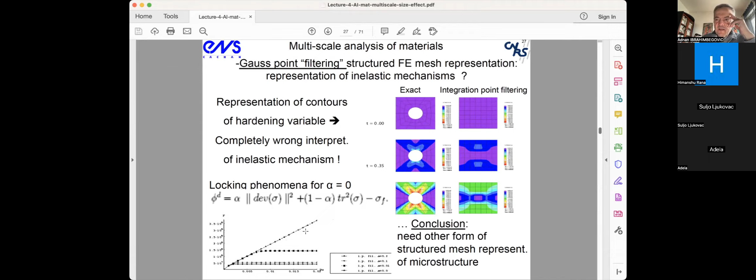So we discussed with Damian how we could improve that, and we did this with the incompatible mode method. This is yet another choice - incompatible modes - for when you have a discontinuity in the strain field, as you'll see in a moment. So if integration point filtering is all the way up and the smeared model is all the way down, the incompatible mode method is very close to the exact solution.

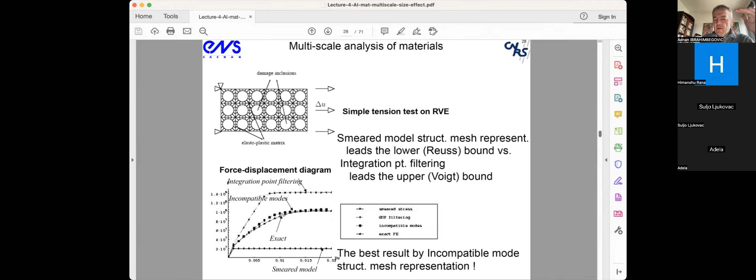So what is the incompatible mode? We come back to this 4-node element, and we come back to the core difficulty it has to face. Namely, if these are two phases, with Young's modulus of phase 1 and Young's modulus of phase 2, by equilibrium, the traction on the positive side of n and the traction on the negative side of n should match. Traction equals the stress tensor sigma times n.

And then you can develop the two components inside: this is sigma nn, and sigma ns - sigma nn is the axial stress, and sigma ns is the shear stress.

So if the traction is the same on both sides of this discontinuity in the material, these two stresses have to be the same. Yet if the Young's modulus and shear modulus are not the same, then epsilon nn plus cannot be the same as epsilon nn minus, and epsilon nm plus cannot be the same as epsilon nm minus. They have to be different simply because the materials are different.

Obviously, you don't have that in the standard finite element manipulation of the four-node element. So what you do is enhance this with another type of incompatible mode, giving you a possibility to include the mode n tensor n, which gives enhancement for this type of strain component, and m times n - the symmetric part of the tensor product - which gives enhancement for this type of strain component, with two incompatible mode parameters called alpha and beta.

So again, you can take the incompatible mode method to handle all this and get really the exact result for this particular case, giving you results very close to the exact solution.

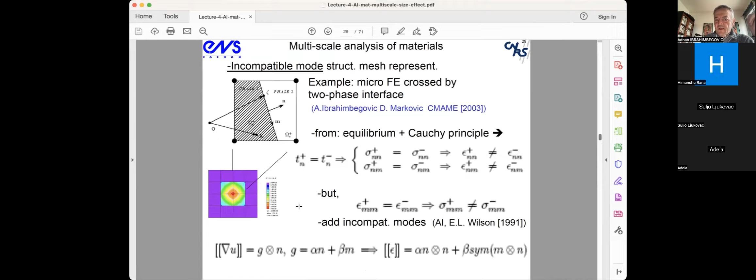So this was representing just the heterogeneity, going into elasticity or plasticity and so on. Now we want to go into more serious issues like the size effect. So instead of taking hypothetical microstructures with a simple illustration using the same finite elements, we have to be more credible in representing the true microstructure of our material, with the ability to include hardening, softening, failure, and so on.

So basically, the idea is that I'm going to take this to be, let's say again, the typical microstructure of concrete.

So what we did with Arnaud Delaplace, we took a Voronoi cell representation of this concrete. Basically, what are Voronoi cells? You start by taking a so-called Delaunay triangulation. You start by putting points at certain prominent places of a microstructure, and then you connect these points one to another. This is worth explaining a little better.

So the idea is that I have this representative element I want to represent. I start by observing a certain number of these points and saying this one is cement, this one is aggregate, and so on. Then I make a Delaunay triangulation by connecting these points with triangles.

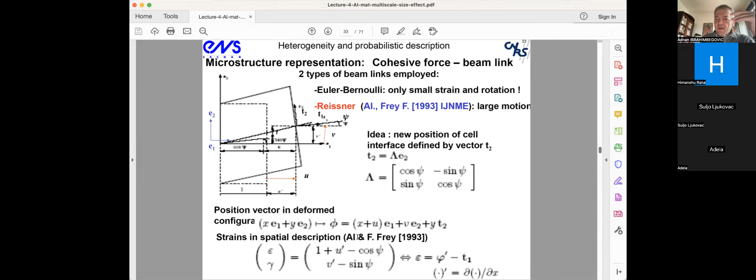Anyway, the idea with these cohesive links was to use this Reissner beam, as opposed to other people using Euler Bernoulli small strain, small rotation, because we could then handle very large displacement and very large rotation, since locally when you start having failure, this thing could really be turning a lot. So you need this to be credible. What that really amounts to is, instead of a Timoshenko beam which simply has psi, here you have a cosine and minus sine, an orthogonal matrix, and then you get your strain field for the corresponding case. We'll talk about that when we go into beams.

So here are some typical results. You see basically the idea that in 1D testing, you're having these beams being broken. The heterogeneity is always such that they can break. It's actually very robust. And then you end up having something like a force displacement diagram, which is very credible for uniaxial breakage. Then also we can have a biaxial traction.

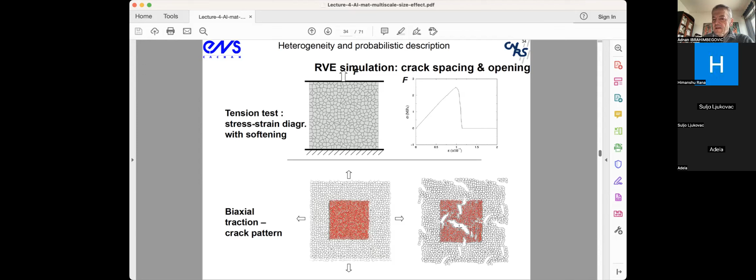And so these red lines are these beams. When you stretch it simultaneously in two different directions, you can see these beams be broken, and you start having your cracks appearing, with crack opening and spacing as we go along. So it really started to give you a realistic representation of your structure.

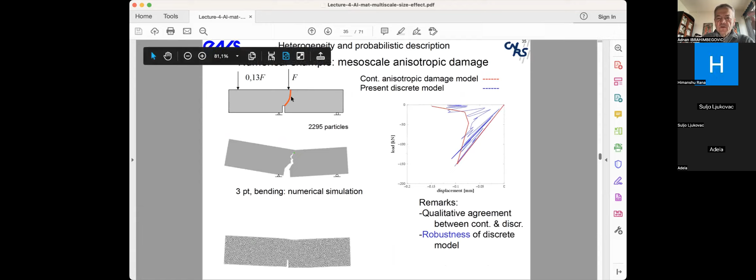We compared this against the anisotropic damage model, the most sophisticated ones at that time. Basically they were handling one of these benchmark problems, this continuous beam with a cantilever part, and with the loading chosen here, F, and here 0.13 F, the crack occurs and then kind of spreads around here. Here, the crack is not so smooth, it's a jagged edge, but if you look at the force displacement diagram, it looks much more realistic in this case as opposed to the other.

This was also used for large scale type of loading when you have very large displacement. Basically, the idea is like in dynamics, we studied this case where you have a big airplane crashing into structures. Just for illustration, we never managed to do this for the people because they were already happy with the results we already provided.

But the idea is there's a problem of whether you can have a so-called spalling phenomena. If you have a static three-point bending test, that's one thing you worry about, the cracks. But in dynamics, typically what you do is drop the weight from a certain height. The weight hits the beam at square root of 2 times g h, h being the height from which you drop, g is gravity. Then you have a compressive wave propagating down, and when it comes to the free surface, it reflects and becomes tensile, and the material, which is sensitive to tensile failure, starts breaking at that point.

So that is why we needed a large displacement, large rotation beam. If you run this with LS-DYNA3D, which we did for comparison, all you get is this red, meaning it's all damaged, but you don't know where this material has gone. We also tried to protect some kinds of nuclear storage facilities from this mass of concrete that splits from the main structure, so-called spalling concrete, which has too much mass and too big a velocity, which could risk hitting the stuff and provoking an explosion.

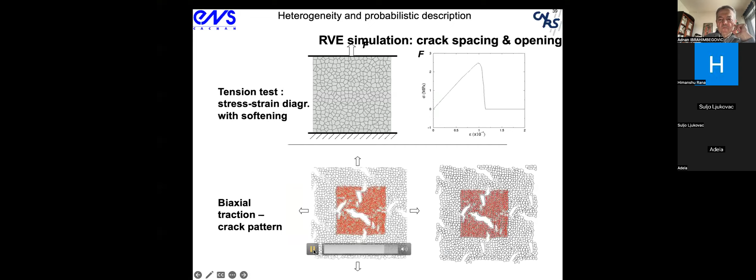So basically, that was this one here. You can see you can stretch it in two directions, and poof - that's the point where it just breaks. Well, you don't see it here because... let me do it like this. Okay, now you can see it's at the point it breaks.

Then you have this one. You can see it becomes very robust because these things are random variables, so the threshold is not the same for each adjacent element. Sometimes you can get into nonlinear computation - you go left, you go right, you get the same result. But here it's always like one direction is weaker than the other, so you can be very robust in terms of this computation.

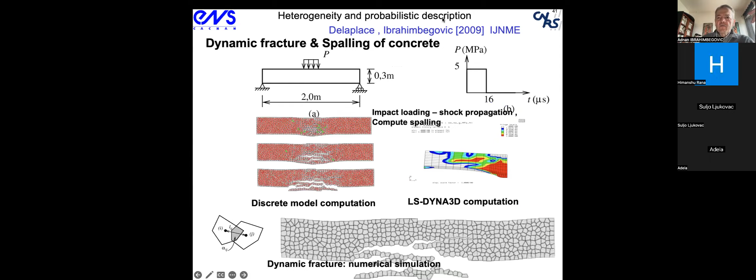And this is the one that I like. This is the simulation. When you have this one, poof, you hit it, and then you can have a bunch of these Voronoi cells that you can quantify the mass and velocity, and you can see what is the risk of the failure in this particular manner.

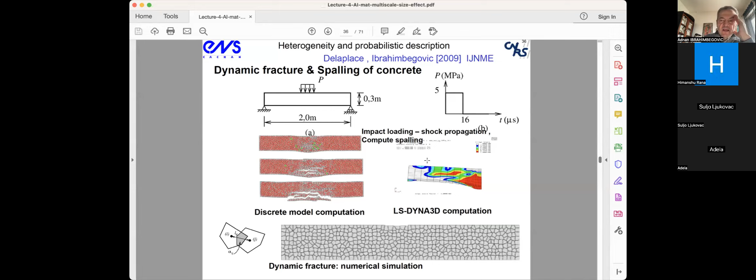So we are here, and basically I can then really get the computation of this. But this was still qualitatively nice - quantitatively we're still not there, because concrete is not a 2D material, it's actually a 3D material. Even with this simple bending, 3-point bending test with a 40 by 10 by 10, you have to do it in 3D.

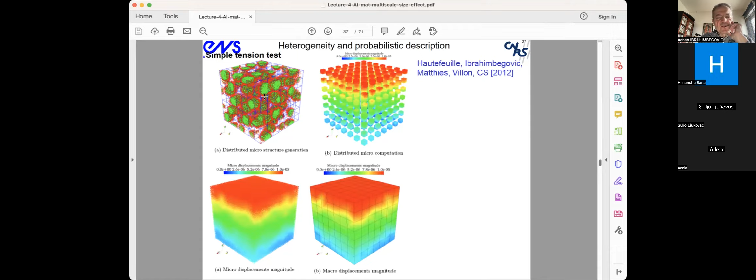And then you have links which are in cement, not so interesting. Finally, the most interesting part is you have links which are a little bit in cement, a little bit in aggregate. We took the properties similar to the aggregate, although typically you would have slightly weaker points, because in real life, the aggregate is already dry and the cement is drying, so there's something called self-desiccation cracks that weakens the properties of the interface. You don't know exactly, so you have to postulate it and so on.

So basically, for this type of links that are a little bit in aggregate, a little bit in cement, there were comparisons against XFEM and embedded discontinuity. There was work by Belytschko and Jirasek, where they convinced Jirasek that embedded discontinuity is not good enough, so they went for representing it with XFEM.

So what is the XFEM representation when you have this? Here you have two different material properties, and then your interface where this thing is breaking. So you take a displacement field constructed by two standard shape functions, and on top of that, you have this Heaviside function that introduces the crack at this particular point. Then you put the field description with D1 times N1 and D2 times N2, with D1, D2 being the displacement at the nodes.